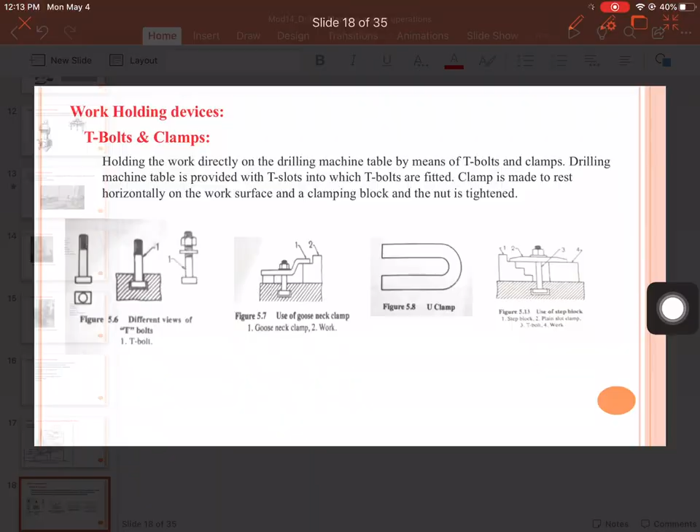Good morning, friends. Today I would like to discuss something related to the work holding devices and tool holding devices related to the drilling machine. These work holding devices are also very much common with other machine tools like milling machine, shaping machine, planing machine, and slotting machine. You can refer the same video related to the work holding devices of all these machine tools.

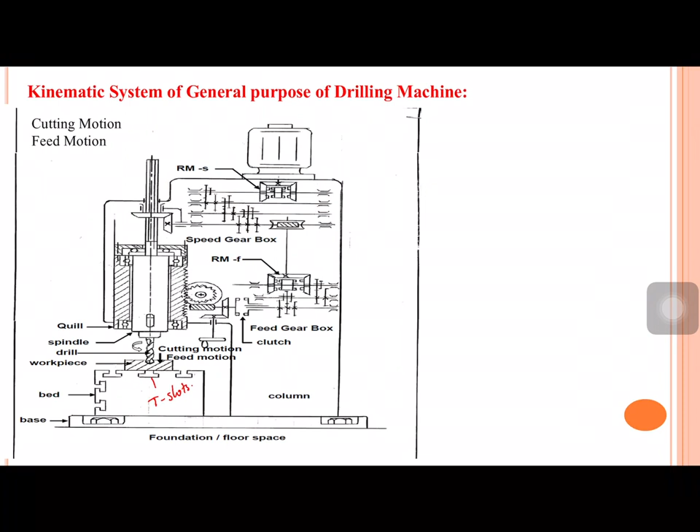Before going into the details, let us start with the table of the drilling machine, which is provided with these T-slots. In this T-slot, the bolted head of a nut can be placed. The bolted head, this is the square head, which can be placed inside this T-slot.

By using these clamps, you can hold work parts of different dimensions on the table. Not just one - there are multiple clamps placed at the corners of the work part so that it can be rigidly held on the table without having any kind of motion. That is the purpose of these T-bolts and clamps.

We have a lot of variations in the design of clamps that was provided in your reading materials, or you can refer any textbook for different types of clamps. Here you can see the clamp, one is the clamp and two is the work part, and this is called the goose neck clamp. By using the T-bolts and clamps, you can hold the work part rigidly.

Here you can see the utilization of the stepped block. Again, here you can see the plain slot clamp - this two is called the plain slot clamp, and here this is the stepped block. The function of the stepped block is, if the work part dimensions are varying in your workshop and you want to do different heights of work parts in your milling shop, then you can use this stepped block.

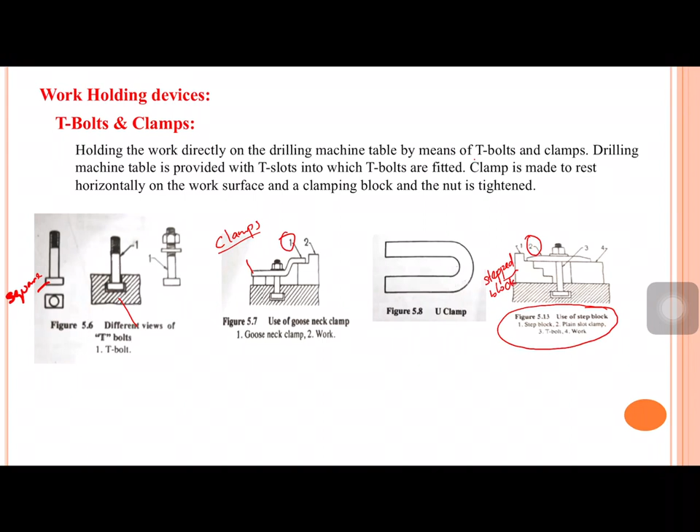If you use this plain slot clamp, on one side that will be placed directly on the surface of the stepped block, and the other side of the clamp is placed over the work part surface, and this clamp is held by using the T-bolt and nut, so that the work part can be held rigidly over the table. So the main purpose of the T-bolts and clamps is to hold the work part on the drilling machine table.

Next one is the drill press vise. What we are going to do is place this vise over the table by using these T-bolts and clamps, just like what I discussed earlier. Here I can place this T-bolt, and here also I can place this T-bolt, so that the bench vise can be fixed rigidly on the table. Now you can see this is the fixed jaw and this is the movable jaw.

This movable jaw can be shifted in location, or translated, by using a mechanism called the screw nut mechanism. You can place the handle at this location and rotate it so that the movable block can be moved to the left or right hand side to accommodate different sizes of the work part. This is typically recommended for small or regular sized work parts.

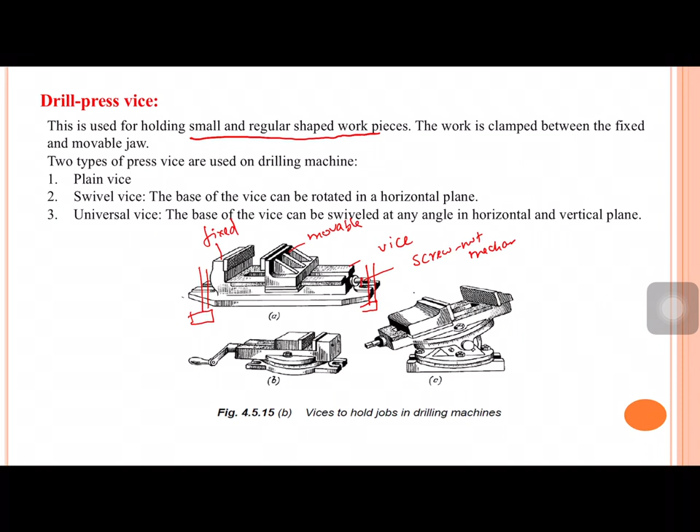There are three varieties of the drill press vise. There is the plain vise, that is what was discussed till now, and the swivel vise. The swivel vise can be rotated about the vertical axis or in a horizontal plane. This is the handle used to move the movable jaw, and in between the movable jaw and fixed jaw you can place the work part. The interesting feature is you can swivel this bench vise about the horizontal plane or about the vertical axis, so that you can reach different locations on the work part without needing to adjust the table during machining.

Here there is a vise called the universal vise. In this universal vise, you can swivel the bench vise not only about the horizontal plane but also about the vertical plane. So if you rotate about the vertical and horizontal planes, you can get inclined holes also. Even though the drill bit is moving in the vertical downward direction, you will get inclined holes on the work part. That is the utility of the bench vise. These are typically called the drill press vise, used on the drilling machine.

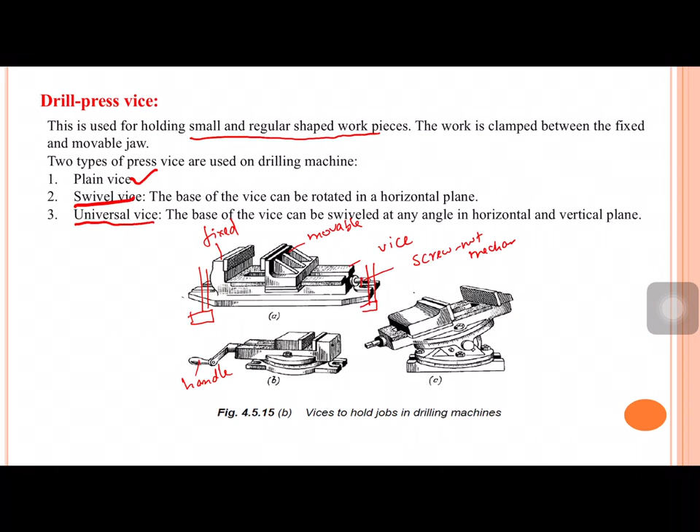Next is the stepped blocks, which we already discussed in the earlier slide. These are used in conjunction with T-bolts and clamps for holding the work part directly on the table. If you want to accommodate a particular height, you can use this plain slot clamp, something like this. Different sizes of work parts can be accommodated using the plain clamp, plain slot clamp, and the stepped block. One surface of the plain slot clamp is placed over the stepped block, and the other is placed over the work part. Depending on the dimensions of the work part, we use multiple clamps, maybe 2, 3, or 4.

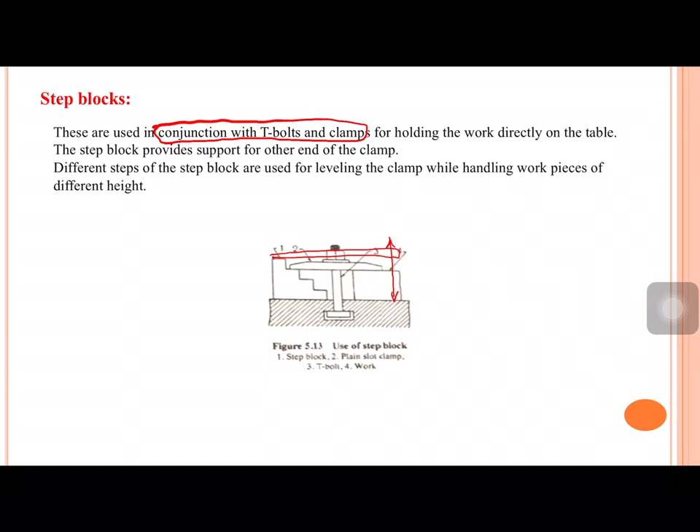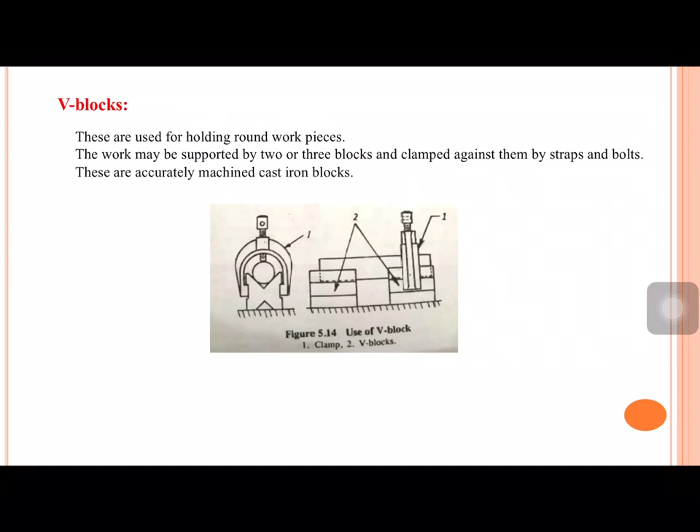Next is the V blocks. These V blocks are placed directly over the table, and are typically recommended for holding cylindrical or rounded work parts. You can see these are the rounded workpieces. The V blocks are placed directly on the table, and the cylindrical work part is placed over the V block. The axial movement is restricted by using clamps and straps.

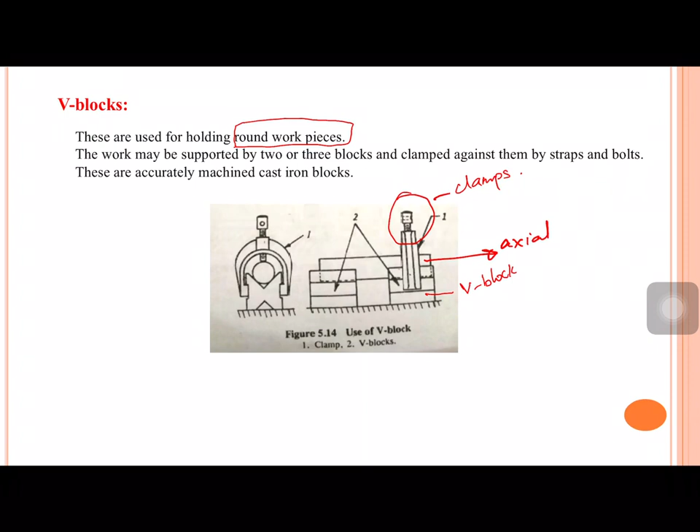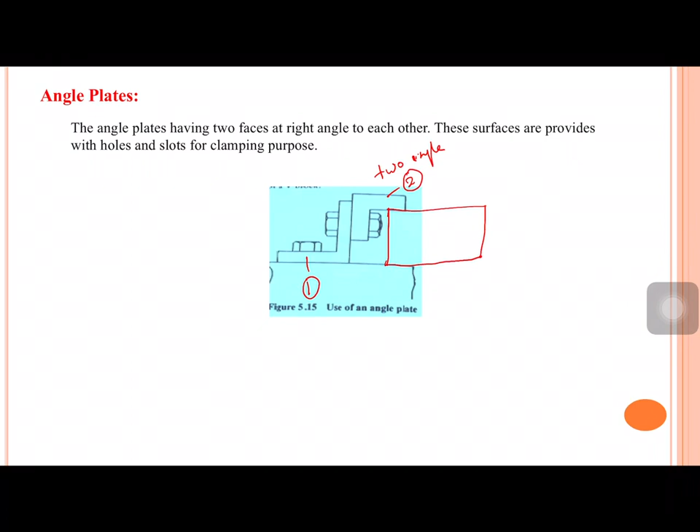Next is the angle plates. The angle plates have two faces which are perpendicular to each other. Now what I'm doing here is using two angle plates in conjunction so that the work part can be held against the table, something like this. This is one angle plate, the first, and this is the second angle plate. These two are used together so that the work part can be held rigidly over the table. We use more than one such arrangement so the work part can be held rigidly at the corners.

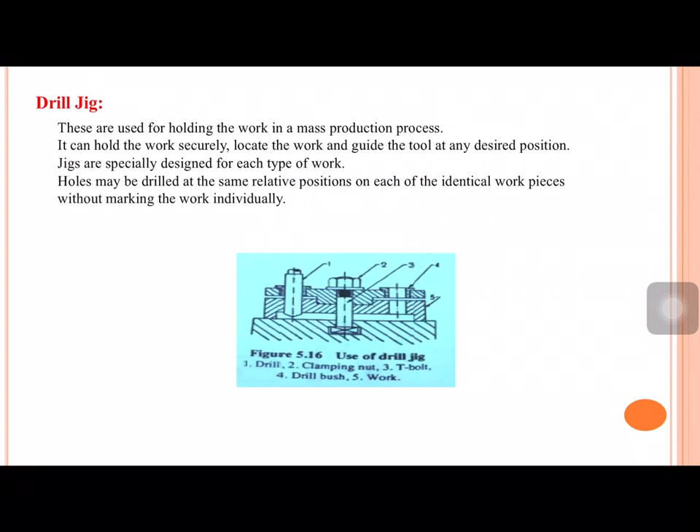Next is the drill jig. The purpose of the drill jig is typically for mass production. Why is it recommended for mass production? First, let us try to understand that.

Whenever you are doing drilling or producing a hole, first we need to do the marking operation. Marking means using the scale and the scriber to mark the location where you want to drill the hole. Once that step is completed, you do the punching operation using the dot punch at the cross-marked location where you want to drill the hole. These two steps are mandatory before actually going to the machining operation. So what are the ways that can be utilized so we can avoid these two steps?

That is the purpose of the drill jig. The drill jig is directly placed on the work part. Here you can see this is the workpiece, and this is the drill jig. These T-bolts and clamps are used to hold the combination of this workpiece and the drill jig. So whenever you want to do the drilling operation at this point and location, we simply place the drill jig over the work part, and there are no steps required related to marking and punching. The location where you want to drill the hole is already identified by the drill jig, and at that location we drill the hole exactly.

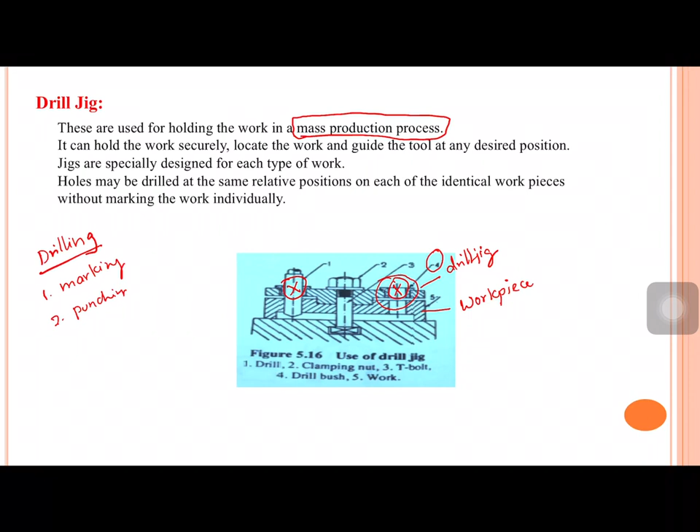And here we are using the sleeves. This fourth component is called the sleeve, so that whenever we do the drilling operation, there is a rubbing action between the sleeve and the drill bit, and due to this rubbing action there is wear and tear that takes place across the sleeve. Once the wear and tear occurs, we can replace this sleeve without replacing the complete jig, so it can be utilized for a long duration. That is the use of this sleeve, also called the drill bush.

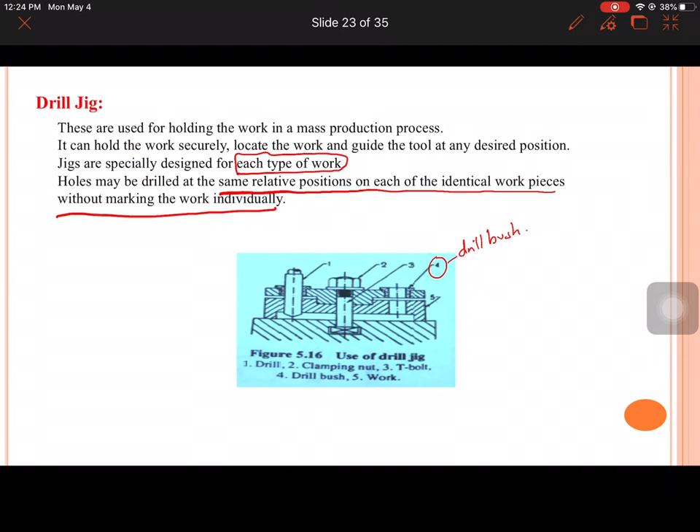So that is the main purpose of the jigs. But there is a serious limitation related to these jigs: they are typically recommended for a particular type of workpiece only. If you want to obtain different hole locations, the entire drill jig has to be replaced with a new one. So the holes may be drilled at the same relative positions on identical workpieces without doing individual marking work. Marking and punching can be avoided completely.

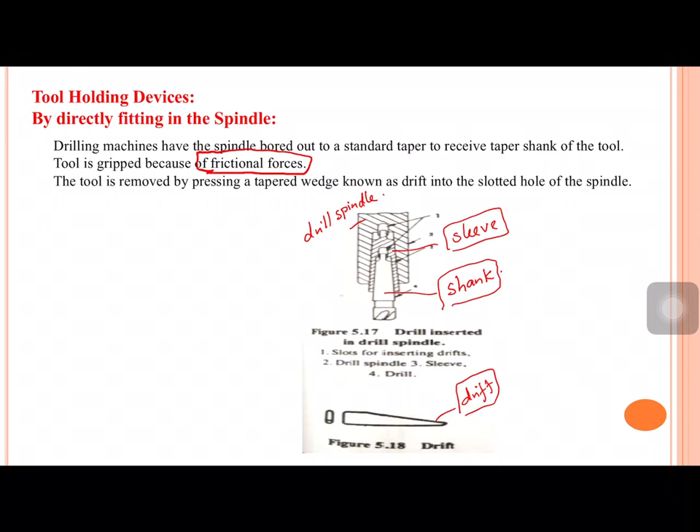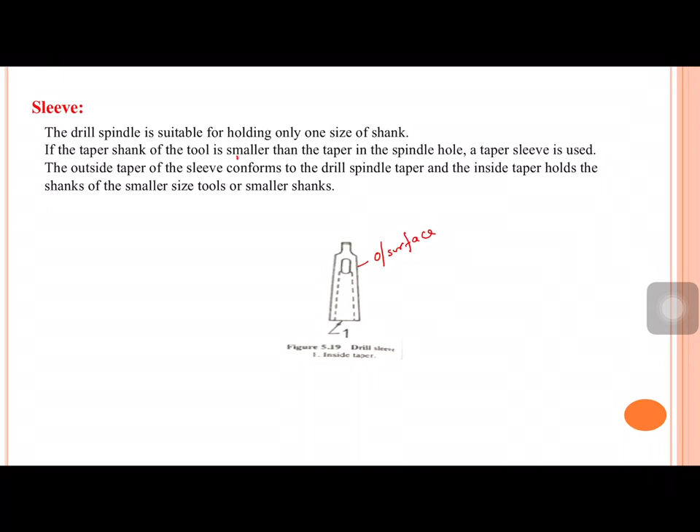Next is the sleeve, which we also discussed. This is what the sleeve looks like. Its outer surface has the dimension matching with the tapered hole provided in the drill spindle, and the inner tapered section provides the seating for the shank of the cutting tool. So if the tapered shank of the tool is smaller than the taper in the spindle hole, this taper sleeve is used. If the taper shank of the cutting tool exactly matches the taper size of the spindle hole, we can directly place it on the spindle hole of the drill head.

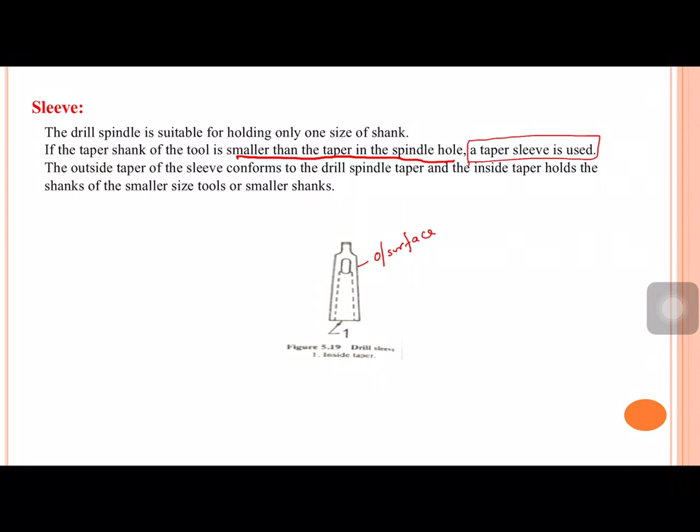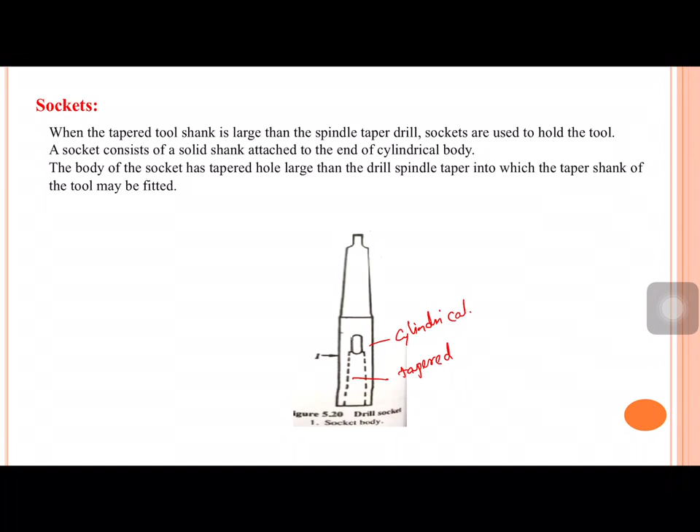Sockets are typically used when the tapered size of the drill bit is bigger in size compared to the tapered hole provided inside this drill head. This is the cylindrical body which is used to hold the cutting tool, and here we are providing the tapered hole which is used to provide the seating for the tapered part of the cutting tool.

Next is the 3-jaw chuck. Just like the 3-jaw chuck in a lathe machine, this 3-jaw chuck is used for holding the tool. There are 3 jaws which are operated simultaneously by rotating the shaft of this 3-jaw chuck.

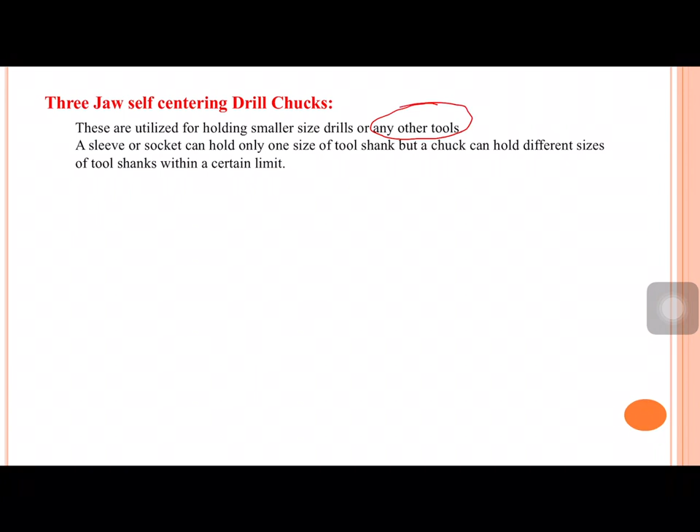The main advantage of using the 3-jaw chuck is that the tool spindle head can accommodate only one standard size of drill bit - if the tool shank is undersized, we use the sleeve, and if it is oversized, we use the socket. But if you want to make some adjustments, using this 3-jaw chuck can accommodate a greater range compared with sleeves, sockets, or the drill head directly. That is the usefulness of the 3-jaw chuck, but these are typically recommended only for smaller dimension drill bits. So with this, I will stop this session.